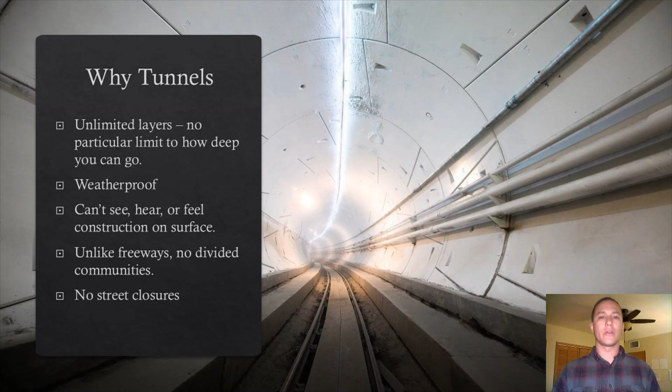There's no street closures. We're seeing that on Broadway and all over Tucson right now, that when improvements need to be made to the transportation system in our existing communities, roadways need to be blocked. There's disruption. There's slower traffic, whatever the case may be. There's a lot of impact. However, with tunnels, you avoid almost all of that completely by keeping your construction completely underground.

However, there's a few problems, a few challenges that come with constructing tunnels. Tunneling today is a very slow process. It takes usually 3 to 6 months per mile. It can take up to a year or more in some cases just to get 1 mile. It is 14 times slower than the pace of a snail, just to kind of put things into perspective. And that's using the current fastest tunneling machine in the world. It's still 14 times slower than a snail.

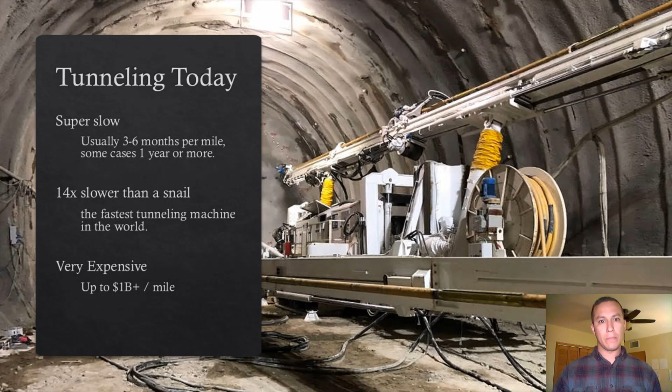And it's also very, very expensive, up to $1 billion per mile, and even more. So it's incredibly expensive and it's really slow. So obviously, starting off, there's a number of challenges that The Boring Company has got to meet in order to make this a viable option.

One of the things that the Boring Company needs to do is increase the speed. As we saw, it's about 14 times slower than the pace of a snail. And so to make this a viable option, they need to obviously decrease costs, but also increase the speed at which they create these tunnels.

One of the ways that they do that is through automated segment erection and logistics. From what I gathered from my research, in tunneling, 10% of the time is just cutting through the soil. It's just advancing the auger. The other 90% is the logistics of removing the dirt, placing the segments, and installing the reinforced segments into the hole. And so what they've done is they've really sped up the process.

They have this simultaneous mining and installation of the reinforced segments, so that way they can dig and reinforce all at the same time. Also, they've increased the power of the boring machine itself, so that way it's able to bore a lot faster. And they've gone through a number of different iterations of the actual boring machine, and they just keep improving it, making it better and better.

They're able to allow for continuous dirt removal. So usually, for standard tunneling, the boring machine will go in, make the cuttings, and then they'll have to come in, remove all the dirt, and again come back to place the segments and reinforce the hole itself, and then go back in and dig some more. But they're just making it kind of one fluid motion.

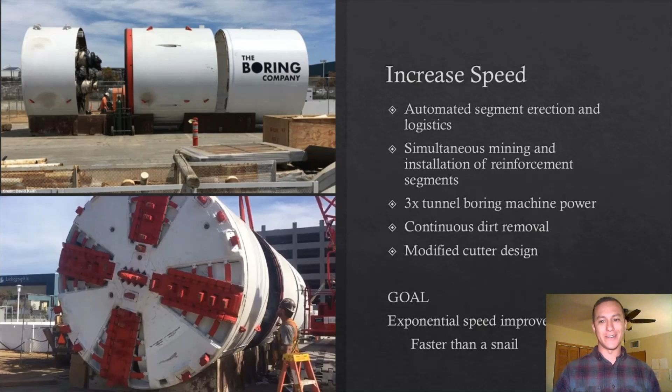Decreased cost. Obviously, $1 billion per mile isn't very practical when they're thinking about the scale at which they want to do these types of loop projects. One way to decrease the cost is on-site integration. They're doing everything on site. For example, a lot of times when tunneling occurs, they cut the dirt, remove the dirt, and bring in imported dirt for the reinforcement.

They're going to make and sell bricks and be able to make that much more of a profit. And in some cases, Elon Musk even believes that through the sale of their bricks, they can pay for the entire tunnel itself. So that's a pretty ambitious goal, but he believes it can be done.

Reduce and standardize tunnel diameter. Typical tunnels are a lot bigger, I believe 28 feet or larger. However, with these, only a 12-foot diameter hole is really needed for the vehicles passing through them. So a lot smaller hole, a lot reduced cost.

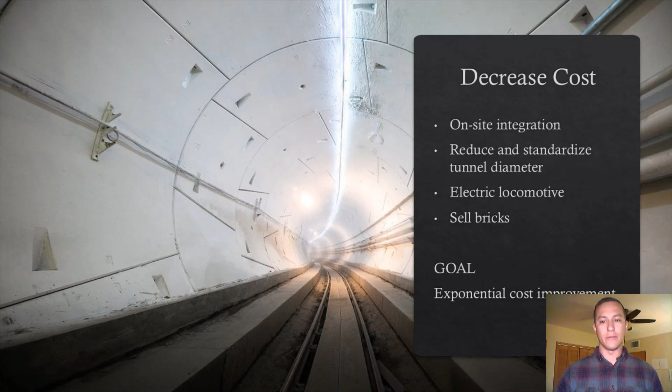So the first thing that the Boring Company did was they created a test tunnel. It's located in Hawthorne, California, and it's being used for research and development of the Boring Company's tunneling and public transportation systems. They obviously want to create more of these tunnels, and so they need a tunnel to test it out.

Just a few questions and answers about this test tunnel: where does this tunnel alignment run? It's at their SpaceX property, and it's just over a mile in length. This project was completed in December of 2018, and it only cost $10 million. Like we said in the previous slides, typically a 1 mile stretch of tunnel would cost up to $1 billion. However, they were able to reduce that cost through some of their revolutionary techniques and the size and so forth.

Why are you building an elevator, a loop lift, in a garage in a house in Hawthorne? So one end of the test tunnel could fit within the size of a house garage. And they wanted to do that because they wanted to demonstrate that a lift can be built in very small footprints within existing buildings, whether it's a house, office building, retail parking lots. And looking forward, one could have a lift in the basement of an office building. This could allow extremely convenient commutes.

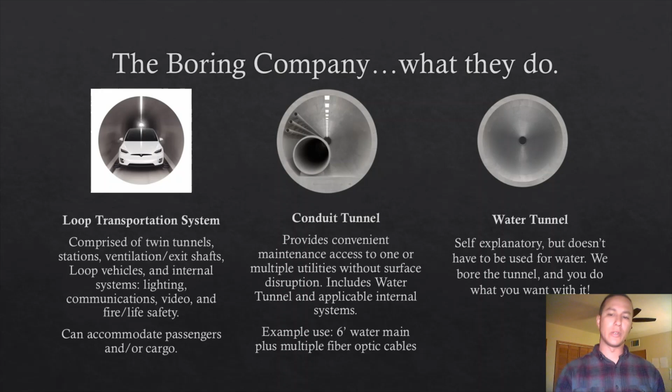The loop itself. So what's the whole purpose of it? What does it consist of? It's intended for autonomous electric vehicles. Again, like I said, not necessarily on tracks. It is a roadway, but they have wheels that come out the side that ride along like a track. Also, it's intended to have multiple stations.

So one downside to, say, the subway system is that it goes so far and then stops at a certain station and unloads and loads people. However, those people might still be far away from their destination. With the loop, you can create countless stations, because it tends to have a main artery that travels at speeds of up to 150, 155 miles per hour, and then could easily exit to a nearby exit station, and you can have as many of those as desired. Again, because it's underground, you have a lot of opportunity there. The elevators can be either spiral, ramps, or just drop elevators.

A lot of times what they plan to do is construct these off-site, and then once they're fully fabricated, bring them on site and install them to alleviate construction zones and things going on in the community. They could be fast and low-cost tunnels. As we've seen, they've been continually developing their tunneling system in terms of cost and speed.

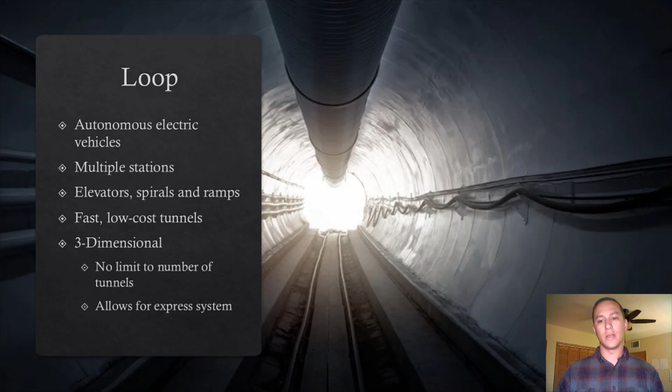For example, this is for the Las Vegas Convention Center. This is an existing project in the making right now. Now, this is not necessarily for vehicle transportation per se. It's more for individual personnel transportation across the Convention Center campus, which is rather large. It can get these people from A to B. It's actually the Boring Company's very first commercial project, and it's currently in construction. It's approximately 40 feet below existing grade, and instead of attendees walking across the campus in 15 minutes, they can take the loop tunnel and get there in just over 1 minute.

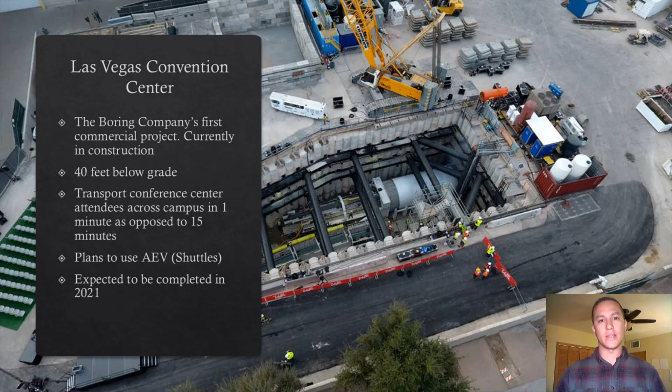They plan to use autonomous electric vehicles. These would be more of a shuttle vehicle, not your typical Tesla vehicle or standard sedan. And it's expected to be completed in 2021. So if you're ever in Vegas, be on the lookout for that. It's going to be pretty neat.

This is the Vegas Loop project, which is not quite official and finalized. It still has a few things to go. The Vegas Loop could include many different service extensions, including those shown on the map. You can see the solid blue line, that's the Vegas Convention Center loop that we just took a look at. However, this could be for the entire city going across the Strip.

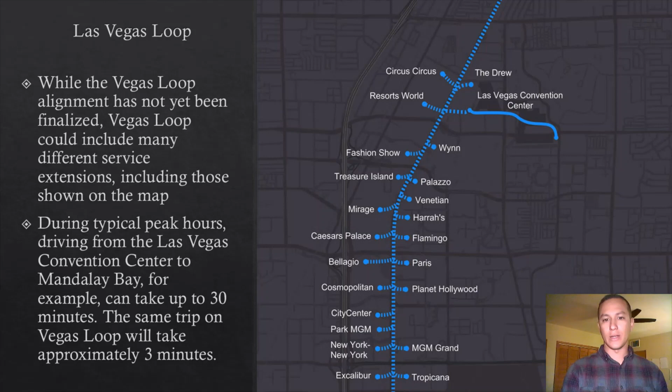During typical peak hours, driving from the Vegas Convention Center to, say, the Mandalay Bay could take up to 30 minutes. However, with this Vegas Loop, it will take approximately only 3 minutes. And as you see, there are multiple stations that can take you to specific hotels and casinos, nearly right to their doorstep, in minutes rather than half an hour or more getting from point to point.

They have a lot of future projects in the works. These are all potential. They're working through environmental review and permitting, contract review and permitting, across the country from LA, Chicago, and in the Northeast, DC and Baltimore. The Dugout Loop in LA is planning to connect Dodger Stadium to a few of the neighboring communities, including Los Feliz, East Hollywood, and Rampart Village. And if you've ever been to a Dodger game, you know how bad it is getting out. Traffic is one way in, one way out, and it's just horrific getting out of Dodger Stadium when the games are over.

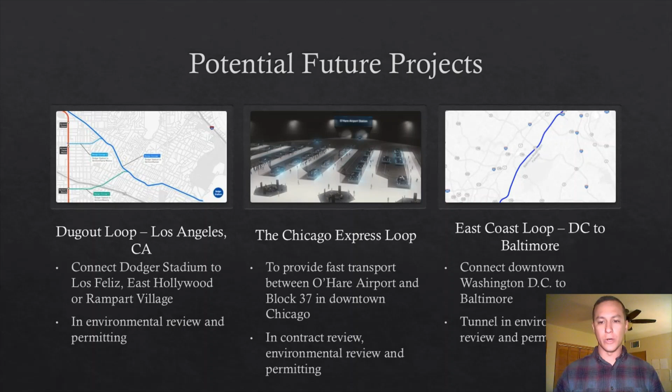The Chicago Express Loop is planning to go between O'Hare Airport and Block 37 in downtown Chicago, transporting people to and from the airport. And they have also planned the East Coast Loop from DC to Baltimore, connecting those two communities. Again, these are projects in the works, but it looks like they plan to be moving forward.

And as Elon Musk said, one day it will connect to the Hyperloop. So one of his goals is to incorporate his SpaceX company, Tesla, and the Boring Company all in one to have a Hyperloop, potentially underground, connecting communities at far distances. So it's pretty interesting. I had a lot of fun researching this topic.